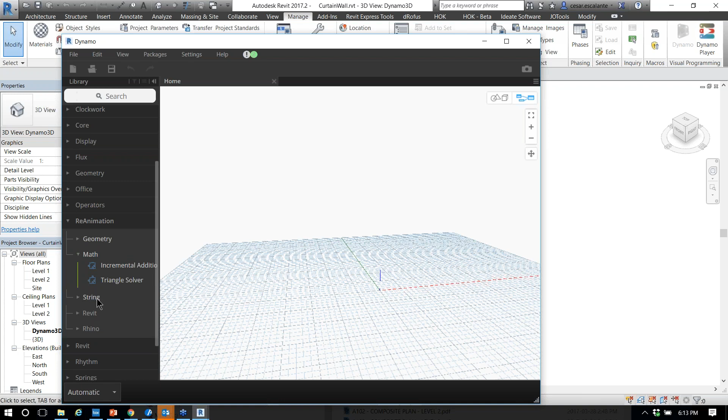So in Dynamo, I was looking for a way to automate the distribution of grids in curtain walls. And I've been searching for that magical node that allows us to do that. And through that, I came across this. You can see I have a lot of packages installed. I came across the Reanimation package by Travis Williams, who developed this little package which has a lot of interesting tools.

The ones related to Revit, these two nodes really caught my attention. One is the ability to move or readjust curtain grids. Another one is the ability to create curtain grids in curtain walls. Parametrically, that has always been a challenge, because one thing is to be able to select grids, another is to be able to delete them and recreate them without needing to run the script twice. After a couple of tries, I was able to come up with a very nice workflow.

So the potential uses of this: think about what it takes to create a pattern-based curtain wall. If you use the out-of-the-box functionality of Revit, all you see is regular distributions that are equally spaced, and you follow those three rules, I think, start, the beginning, end. But what if you want a distribution, let's say, 4 feet, 2 feet, 3 feet, and repeat that pattern over and over? That's not something that Revit does out of the box. So let me show you the script here.

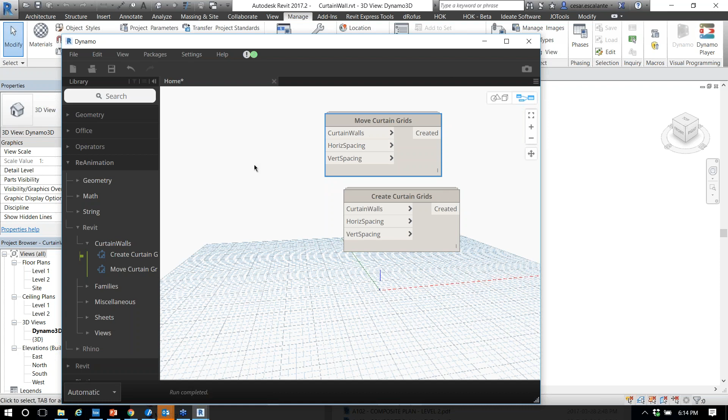This is a blank new project in Revit, and all I'm going to do is create a new wall using the out-of-the-box curtain wall. If you're not familiar, this is the gigantic piece of empty curtain wall. This doesn't have any grids or predefined set of mullions. So if I want to create a pattern distribution of grids, I have to do this one by one, right? The easy way is you create an elevation, start placing grid by grid, then using temporary dimensions, assign them one by one and readjust their location.

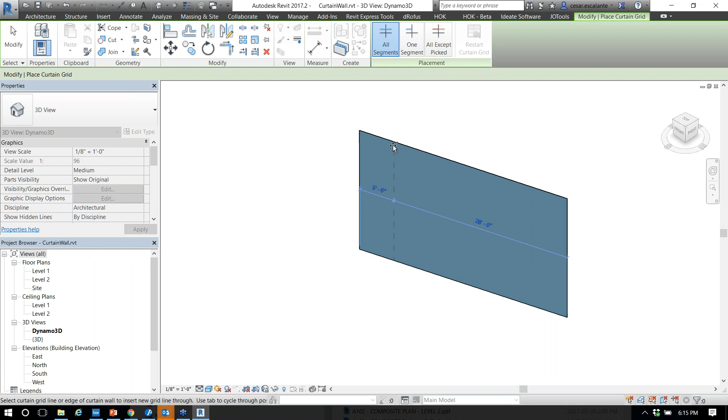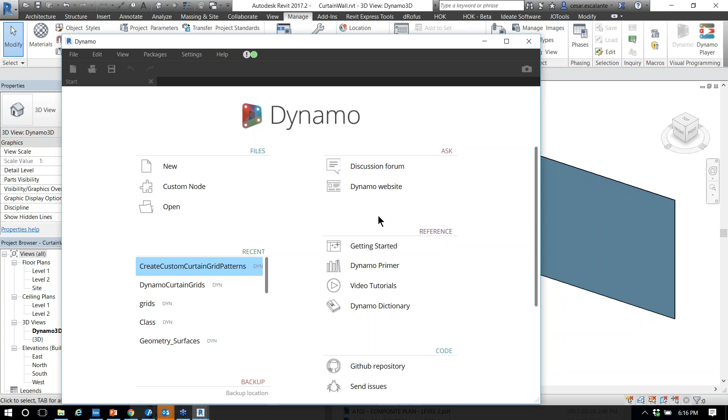This process of putting grids one by one takes a lot of time. And if you decide that the pattern needs to change, I need to basically rebuild everything from scratch. So what a pain, right? So I looked into Dynamo to see how I could expedite the process. I'm going to launch it. I made use of that little node from the Reanimation package. I call the script Create Custom Curtain Grid Patterns. I'm going to show the solution, and then walk into a couple of the nodes.

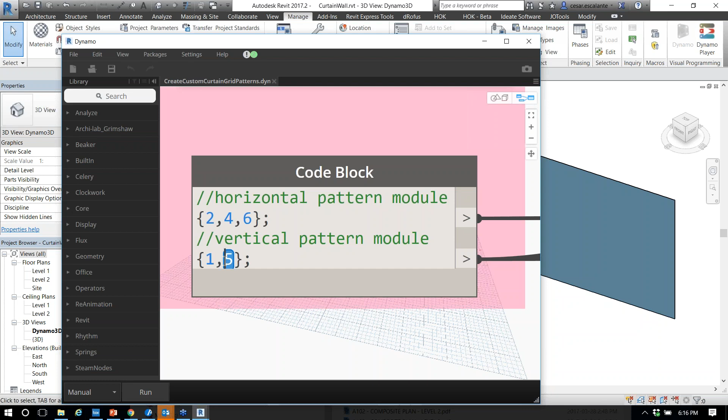What this basically does: I need to select a curtain wall from the project. Then in this little code block, I define the pattern module that I need, both in the horizontal and the vertical. And that's all. This is in the units in Revit, so this could be 5 feet, 3 feet. Let's change it. Let's say in the horizontal, I want something that is 2 by 4 by 6. And in the vertical, I want something that is 1 and 5. Those are the inputs from the user.

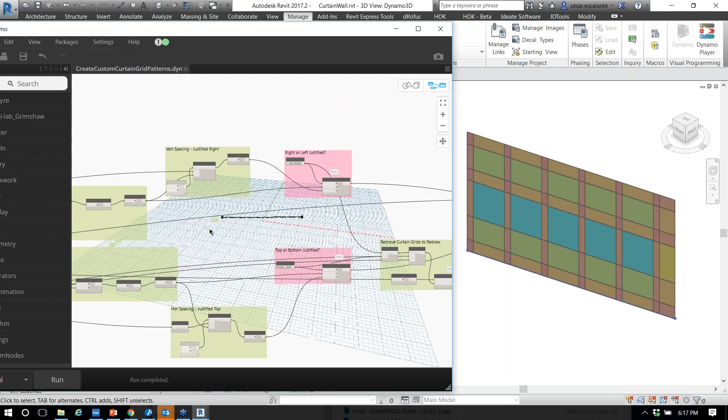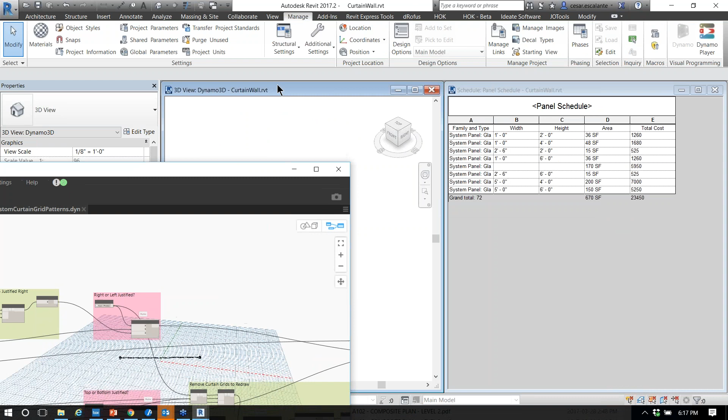Running the definition will create that distribution. The color code is just a way to identify panels by the area and the size. If I'm interested to start exploring things like what is the implication of that in a schedule, then I would open a panel schedule here, go back to my 3D view and tile it, and see what these do.

Say I want to explore different changes and have a total count of panels at the same time. All I need is to go back and revisit the formula. Say my pattern needs to be 4, 6, and 1, and the horizontal pattern changes like 2 and 6. Run the definition, and there you have it.

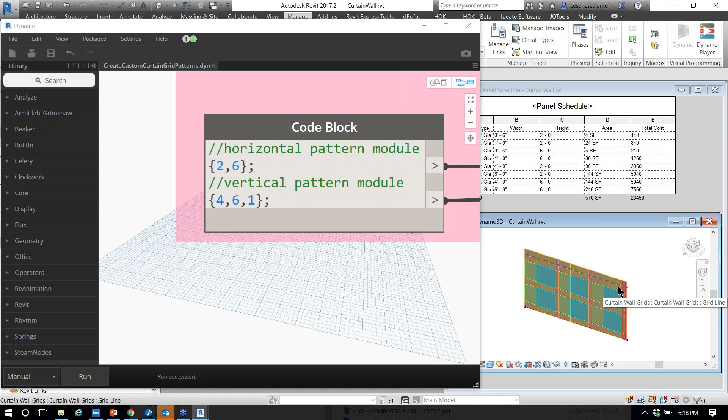Doing this manually, it's really intensive work. And so I have the schedule of all the curtain panels on the side, and I can see the count, and I made a figurative cost to start also looking at what it would take to build something like that. And the beauty of this also is that I have the ability to change the justification.

Say, right now, the start value is from the right. What if I want to do it to the left? If I want to do it from the bottom up? I just change this Boolean and run it again, and that changes where the start point is. And I could go even further and say I want it to be centered. I didn't develop it that way.

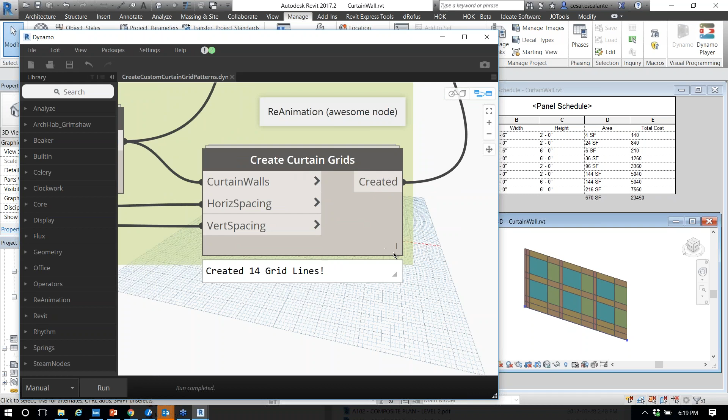But the magic of all of it is right here in this module. This is a way to create curtain grids. And the other complication was, to enable it, I use this pass-through node to wait for Dynamo to execute a certain graph before it goes into the next one. And so this is from Clockwork.

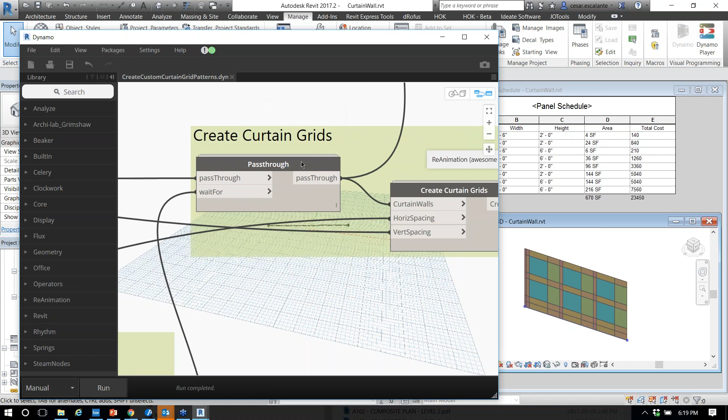So that is the application I have. I thought it was something I wanted to share. So if you have questions, again, the Rhynamo package, you can download it from the package manager. You can start building an application like this directly using Dynamo. Any questions?

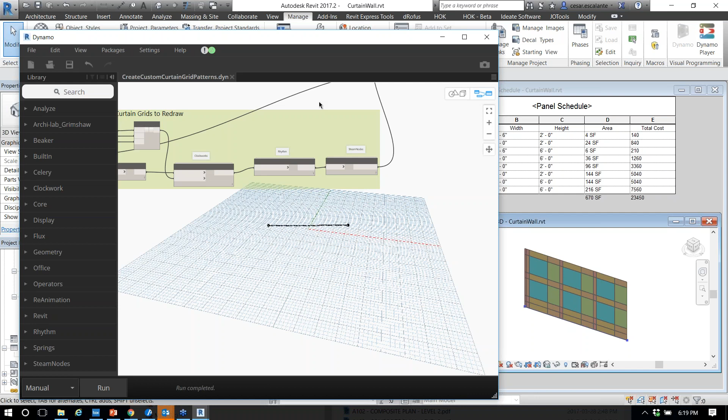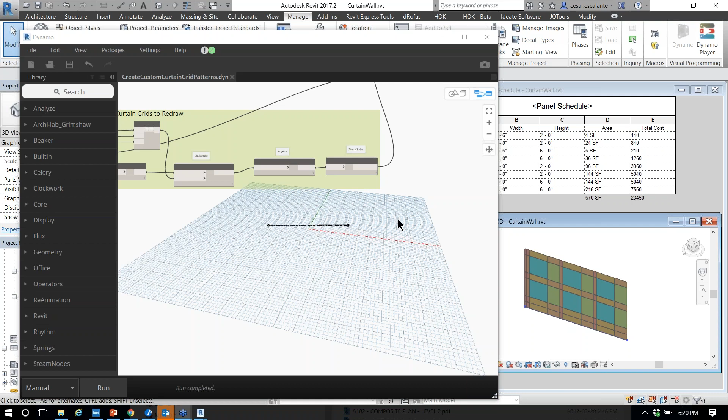All right, so I'm going to hand over the presentation to Thomas Trinelli. I'll just change the mic on the other side because I need my voice. Oh, yes. Make you the presenter. And you can wait. Yeah, it should load. All right. There you go.

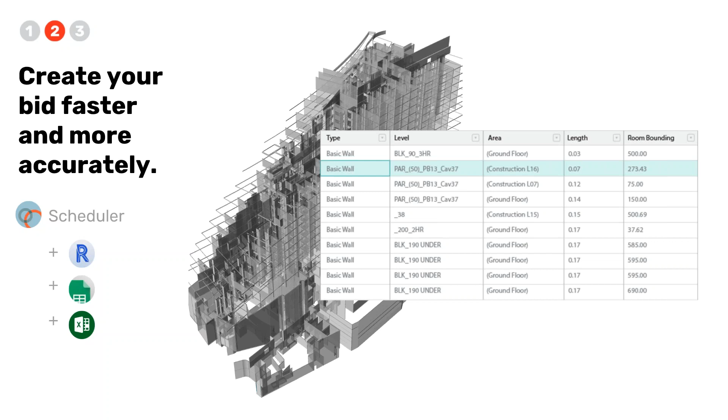And we also are growing these apps. So we have a section called Flux Labs where we surface apps that are currently under development. They're in beta, and we're looking for feedback on them. One that I like is called Capacitor. So early company, pretty nerdy. If you've watched Back to the Future, that should ring a bell. And what this allows you to do is to go back in time for a single data point.

So whenever you send information to Flux, we capture the whole history. So if there's been an issue or an error or something that was introduced that you're not happy with, you can go back and retrieve a past version of that specific data point. So no information is really lost in the platform. You can always retrieve it back if there was an issue. And that's also part of the service that we offer. For a free user, you have about 90 days of data history. To get more, you need a paid subscription.

And we also have a cool one called Terra, which allows you to push the model directly into Google Earth for visualization. So you can just push new geometry, and then on a click of a button, you see that on Google Earth.

And finally, the last section I wanted to talk about is apps that other people have built. So we're an open platform, and we will support and we will help anyone that is interested in building their own apps. We have a team for that that provides support, we provide training for our SDK and API, and so feel free to reach out if you have an idea of something that you would want to build on the platform.

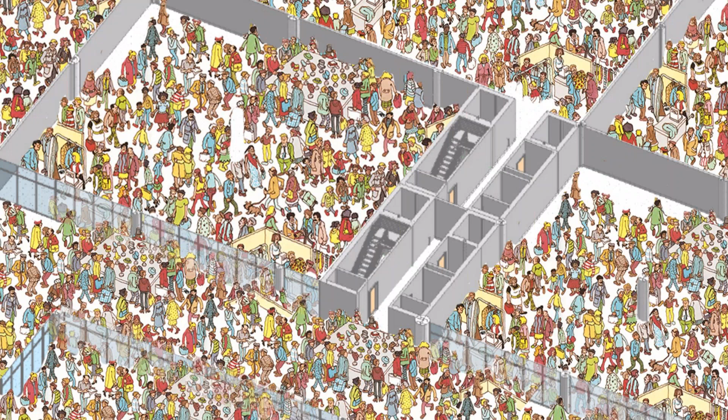All right, so just to finish up on this, the keywords that we tried to keep in mind to define ourselves is Flux is really simple, it's open, and eventually it's powerful, because we are serving data throughout the whole life cycle, and we are eventually going to build this for the whole industry. So, without further ado, what I'd encourage you to do is to start bringing other people in your design. Collaborate more, disregard which tool.

You don't have to worry about, okay, should I start by modeling in a tool or another one? Should I take a course on this one because the team has decided to go with this one? Just choose the one that you like. Choose the one that you're comfortable with, and then make sure the data can be sent to the rest of the team, to the rest of the collaborators.

So we are at Dynamo's user group, so I'm going to give a demo specifically on Dynamo. I have a couple of examples I'm going to go through. Hopefully this should give you a good flavor of the type of things you can do with Flux. So I'm not an architect by training. I have a math major initially, and then I did some structural engineering. So these are just examples of what you could do, but I'm sure you'll get more creative and you'll have a lot better designs than my fake towers that I'm going to show. So feel free to just use them. And also, if you want these scripts or any of what I'm going to show today, feel free to reach out, and I'm happy to share it by email.

So the first one that I wanted to show is creating a floor plan and a building massing. And then looking at how to design a complex parametric facade and create a native Revit topography using Site Extractor, and finally how you can start mining Revit data with Flux. So a lot of people will probably ask me, I can already make a link between Dynamo and Excel if I work on my own computer, so why would I use Flux? Well, what's interesting with Flux is that it's cloud-based, so you don't need to send an email with an Excel spreadsheet. You just need to connect that Excel spreadsheet with Flux.

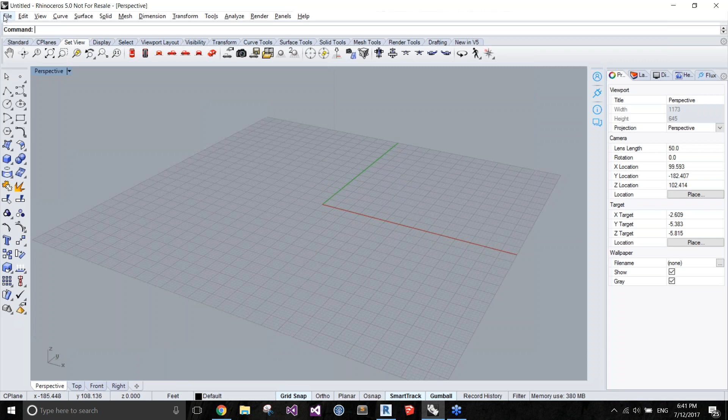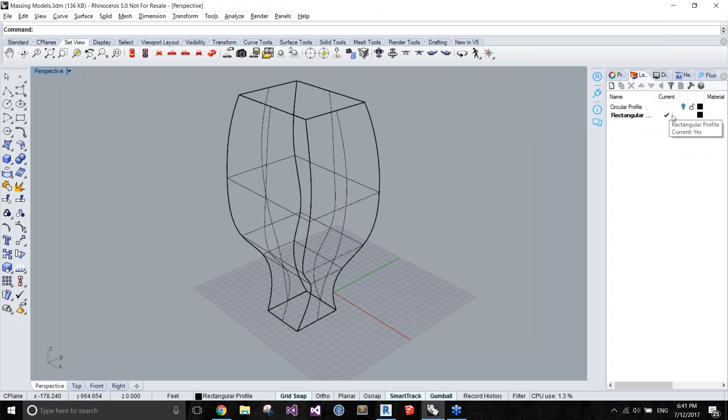So what I'm going to do is I'm going to open a predefined kind of massing model. So what I've done is I've created some, not really simple, but dummy geometries and shapes that you can think of as the massing of a tower. We're just very conceptual right now. We're looking at different options for towers. So I have this little rectangular one and then this more circular one.

And what I want to be doing is taking that massing and start creating a basic floor plan in Revit. And so we'll take the surface either from Grasshopper or Rhino, and we'll slice it directly in Dynamo. So it will arrive as a native BREP in Dynamo directly through Flux. So let's do this. I'm just going to open Grasshopper, and I'll show you that we can do it from both.

I'm going to open the building massing. Wait. Okay, well that's starting good. I'm going to open the Dynamo on the other end. All right, and we're going to open.

And another thing that I am doing in this workflow is also taking the levels from a different source. So assuming the levels have been decided through some sort of an Excel spreadsheet, which will define the different elevations of the level, you also want to be able to integrate all these data sources to create the massing.

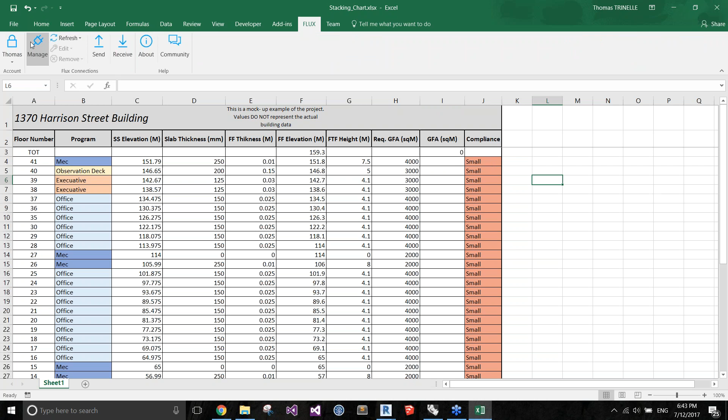And so what I started doing was I created a connection with Flux, and I decided to send the different floor numbers, the different program types, as well as the elevations directly to Flux. So I send them through 3 different what we call data keys. And so the way we communicate in Flux is you create a connection from the tool directly to the platform.

So if I create one live here, I'll just remove this one. What you do is you select the section of data, the cells that you want to connect, and then you create a new connection by clicking Add. And that opens a new window where you have to select a project. So what I'm doing here is, oh gosh, I'm not connected on the right one. There's the risk of making demos. I have lots of different accounts. Let me just connect to the right one.

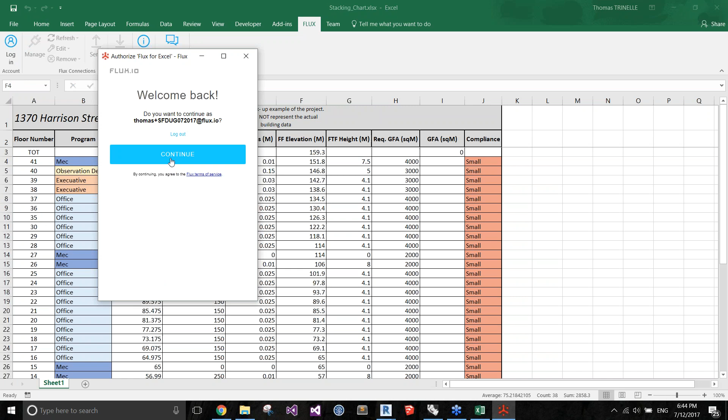By the way, that's a good way to show. So what I'm doing here is I'm logging into my account. Everything you do in Flux is password protected. So it's a secure way for us to make sure the data belongs to you. And we also don't have access to the data that you're sending. Sometimes users come to us and say, hey, I have an issue, can you look into my project? And we're not able to do that unless you give us access to your project data. So everything you send is yours, and it's protected.

So what I'll do, as I said, is I'm going to select that elevation column. I'm going to create a connection, select the SFDUG massing project, and then within it I'm going to select the data key where I'm sending the elevations. So I'm going to do this, and send it. And on the other side, in Dynamo, I'm going to open my massing to floor definition. Yeah. Going on.

There you go. And so same thing with using the Dynamo Flux plugin, you can receive the information natively inside of Dynamo. So it's loading right now, but the first thing you do is you select a project, and then you define what we call a flow mode. So you can either work automatically, which means the data will sync automatically. Whenever someone makes a change, the data will be received automatically on Dynamo, or you can decide to gate the synchronizing speed, and if you click on once mode, you'll have to manually get the new version of the data.

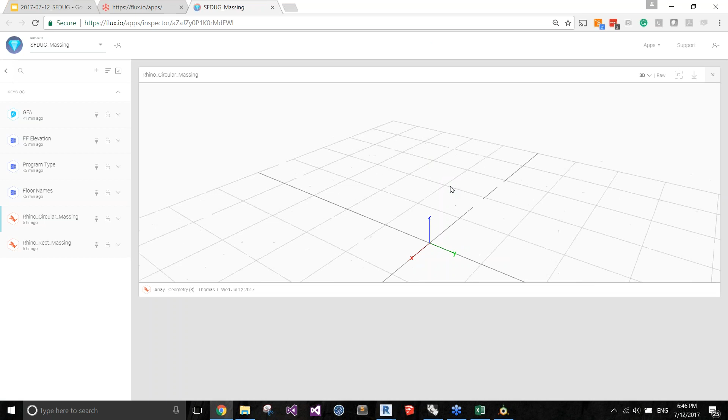And in the background, what happens is that if I go to Flux and I access my platform, I can see that the data is being sent. So if I go to my SF massing project, I can inspect the data, and I can see, for instance, I have the circular massing and the massing for the rectangle building that's loaded, and it's a native BREP. So everything is native, and you can see there is also a scene schema that's being captured.

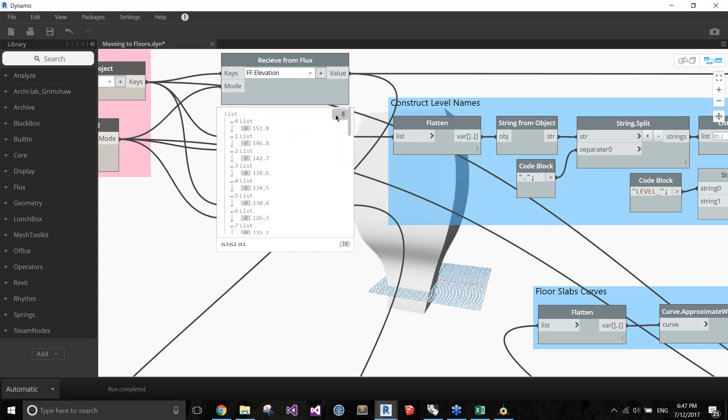So if we go back to Dynamo, I think it's loaded now. I can preview the massing to make sure that it was properly received, and you can see the information arrived in Dynamo, and if we inspect it, it's polysurface, so it really kept the native geometry of what I had initially defined in Rhino. And in here, I'm receiving the different floor names and different elevations that I was sending from Excel.

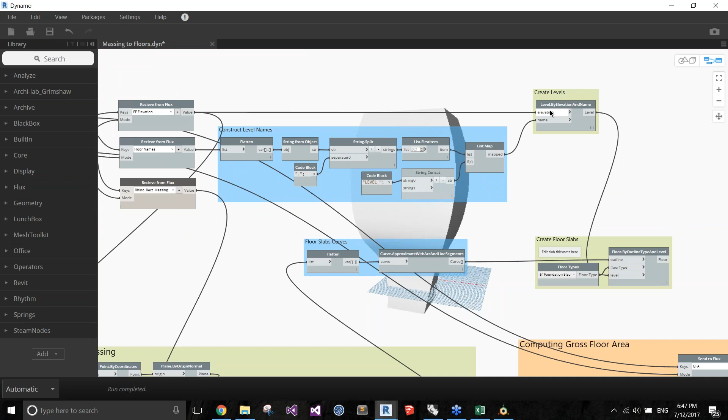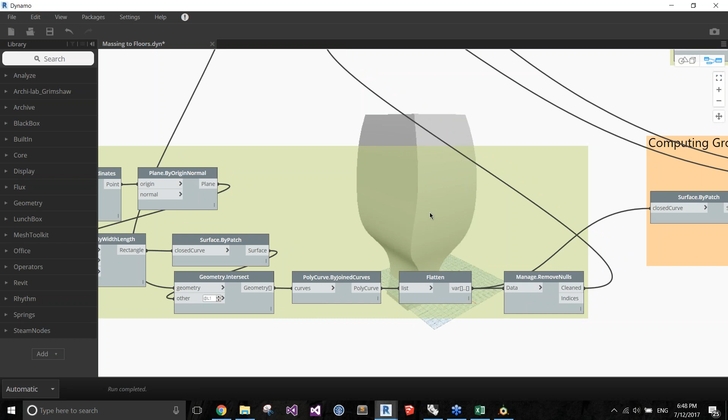And then so I'm sure you guys are all Dynamo users, so I'm going to go a little fast on here, but I'm constructing the level names, then I'm building the levels from here, and then what I'm doing here in the bottom is getting the massing and slicing that to get the different boundary lines that I need for generating the floors. So now that I get all my boundary lines, I can directly create the native floors in Revit. And so if I minimize that window and I look in the 3D view, I have a rough massing of my building being generated in Revit.

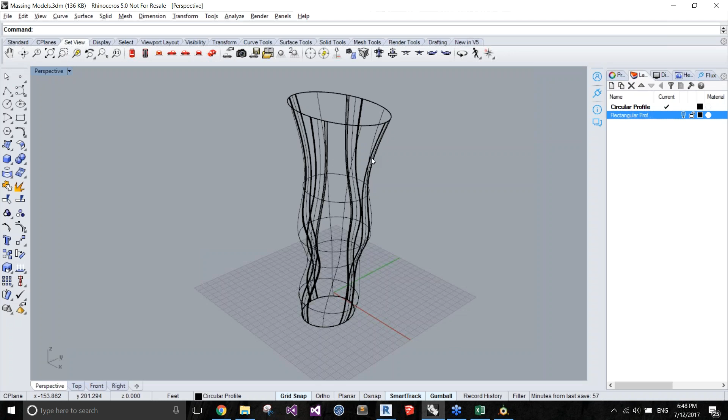And so if I go back to Rhino, and instead of sending the rectangular profile, I send the circular profile. So I'll go to the connection manager for the Flux plugin. I'll just sync and say, please send the circular profile this time. And in Rhino, what I'll do is I'll select the circular profile instead of the rectangular one. And this will change the surface here, and everything will regenerate. So what's interesting is you can let the conceptual work happen in Rhino, and then you can receive that information directly in Dynamo and start doing all of the massing in Revit to start your detailed design work.

And so this is really the tip of the iceberg. I'm sending a polysurface. But you can start sending lines if you're doing line work, or anything you're doing in Rhino could be sent into Dynamo. And same thing, now what I'm going to do is I'm going to receive the gross floor area that I was computing in Dynamo. I'm going to send it into my Excel spreadsheet, and you can see all the elements have been populated, and I have this little compliance check that tells me whether or not that specific floor is compliant with what was required.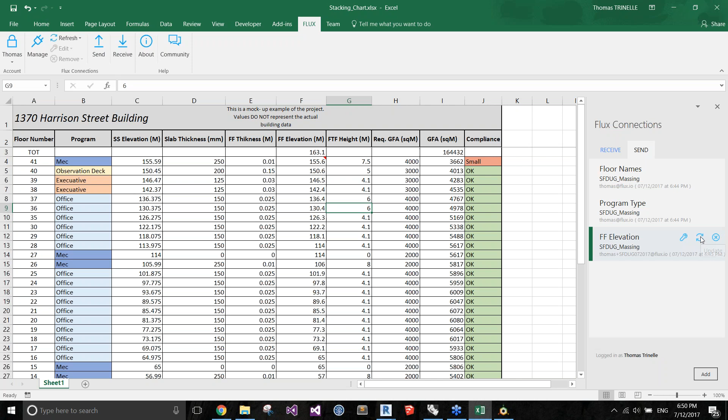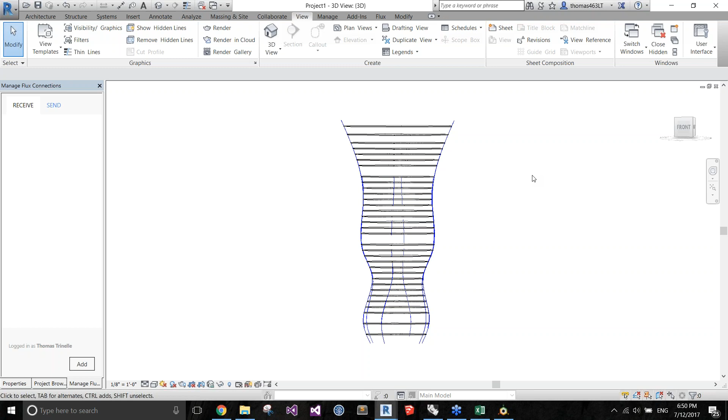If I make a modification and I suddenly decide that I want to change the height of this office space, and I'm going to put 6 instead of 4 for these two, I'm simply going to sync the data of the floor elevation, and it will update the Revit model. So you see the spaces that are being increased. You get a completely bidirectional workflow, and your tools are really working in sync. So you could picture someone doing all the spreadsheet work in Excel, someone else doing the conceptual design in Rhino, and then someone in charge doing the detailed design in Revit.

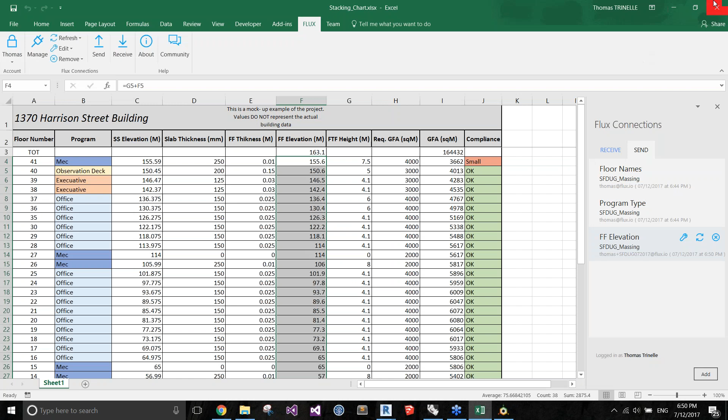So I guess the next one that I want to show, so I'm going to move to the next module, is using the site extractor. I like it because it's fairly visual. It doesn't include Rhino Grasshopper. So I'm going to close this one. I'm going to open a new definition.

So the Excel sheet wasn't generated by Flux. It was created and placed into Flux. Yeah, exactly. The Excel spreadsheet was generated externally.

Someone just sent it to me. You can think of it as a program, and then I sent the data to Flux using the plugin. Yes. Is there a limit in the amount of data you can send via Flux?

Yeah, so it's not limited per data key. If you send 2 gigs in one data key, it'll take quite a lot to just load. But what happens is we limit you in terms of the space that you host in the platform as a whole. So if you create 100 data keys, you might reach a limit, and we limit it at 2 gigs. So right now we're limiting it to 2 projects for free users and 2 gigs of data throughout

the 2 projects. You can also remove the data and repopulate it, and then if you go through the paid subscription, we currently don't have a cap for the number of projects and the amount of data you can store in the platform.

Yes, go ahead. Does it work without the Dynamo tool? Yes, so you could set up workflows to work directly from Revit. We have a Revit integration. Actually, that's one of the modules that I want to show. So for some of what we do, you don't really need to go through Dynamo. And for the sake of here, I'm leveraging the ability for Dynamo to do all these computational logic to do

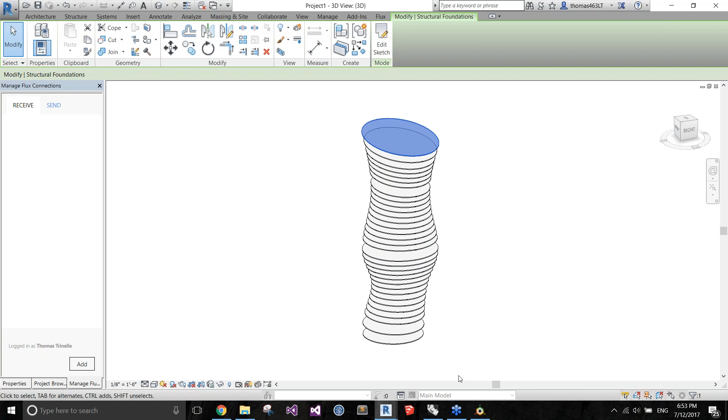All right, so let's go to Flux. Let's open the Site Extractor app. So go back to all the apps, and I'm going to open Site Extractor, which is right here. I'm going to launch it. The first thing you need to do is authenticate. So what we do with all our users is you have to authorize the app to be connected to your account. That's kind of similar to when you install an app on your phone.

So you're going to click here. You're going to allow the app to be connected. And then you select a site. So if we select this building, for instance, in San Francisco, I'll be redirected to that area, and I have this little selection box that I can move around to select a site. I can change the size of the box. I can change the location of my site.

And then what I have to do is select the different data types that I'm interested in. So if you want the building footprint or the building heights with the model and the extrusions, the topography, and so on, you can also define the intervals of the contour lines. So let's say 10 meters, for instance, and I get some water just to see some more interesting topography.

And then the next thing you do is select a project. So for this specific use case, I'm going to use the site context project, and I'm going to send the data to Flux. So what Flux is doing right now is scraping the information. It's taking all the data from OpenStreetMap, the USGS database as well, and it's sending it to the platform.

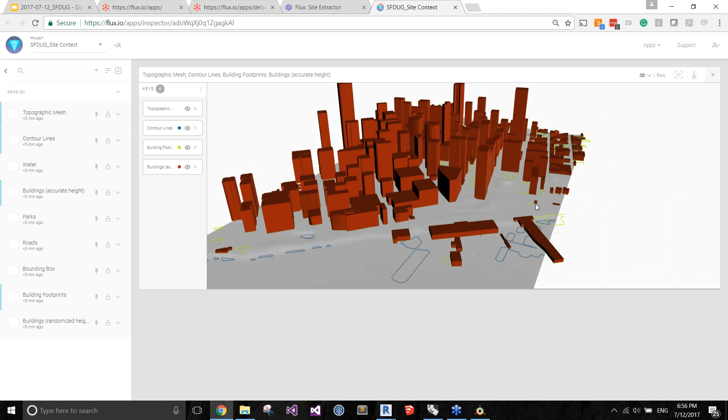So I have all the building footprints of the city of San Francisco in here, and I can also add the massings. So depending on whether or not OpenStreetMap gives us the accurate height of the building, we will generate the whole building massing. You can also get the park and road lines.

So from here, you're probably wondering, yeah, that's nice, that's cute, I can see it, but I want to be able to model with it. So what we'll do is we'll create a native topography from that information. So we're going to go to Dynamo once more, and I'm going to open another definition. And it's very, very simple.

It has 5 blocks. The 3 blocks on the left are the Flux blocks. So as I said, the first one is allowing you to select a project. So you're selecting your Revit topography project. I'm going to change that in a minute, just because I was working with the SFDUG massing project. And then you select the data type, so the data key. So this will be the topography.

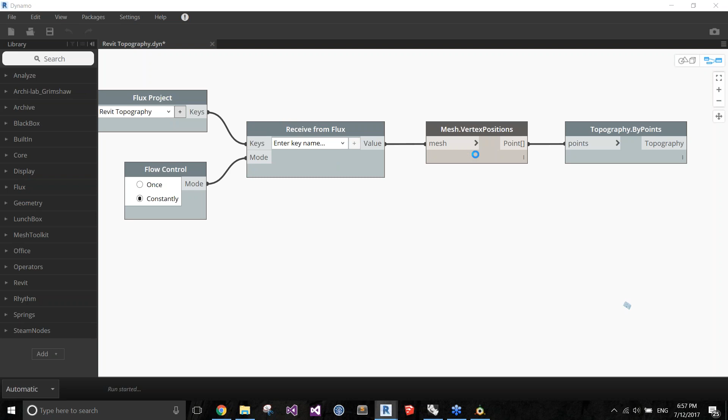And what we're going to use is the mesh vertex block to get all the points from the mesh. So yeah, generating the topography, depending on the size of your topography, can be a little tricky.

Gosh, what's going on with my screen? That's what I was worried about. Revit not behaving.

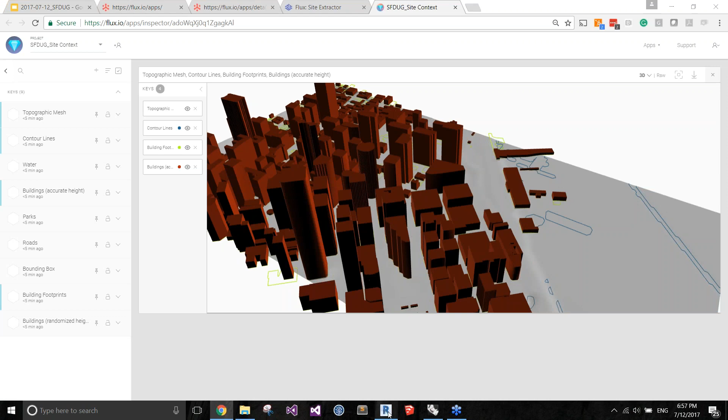The question: are the buildings then part of the topography category? No, so what happened is all the data was sent separately in different keys. So the buildings are just a key with the buildings, and the topography is another key with the topography itself. And so you choose then to send whichever data you want.

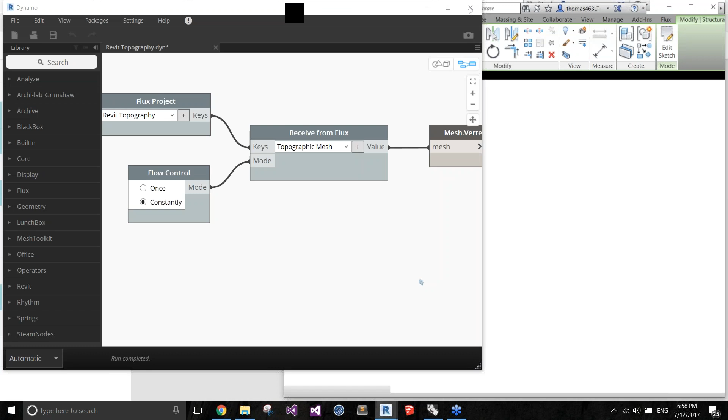So there you go. Okay, that was pretty complex. So let me just do that step by step with you, just to clarify that a little. So I'm going to log out, I'm going to log back in, authorize the app to be connected to my account, like I explained. And then I'm going to select the project, the SFDUG massing.

And this is where you're going to select the topography versus the building height. So I'm going to select the, no, not the massing, sorry, the one site context. And I'm going to select the topography. And this will recover the topography that I've just selected, create the points and create the topography in Revit.

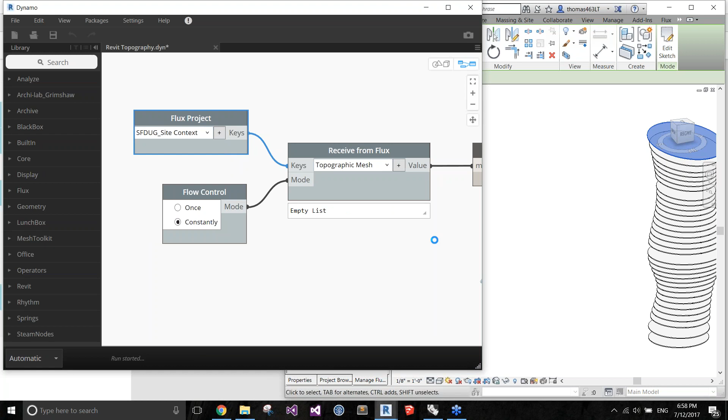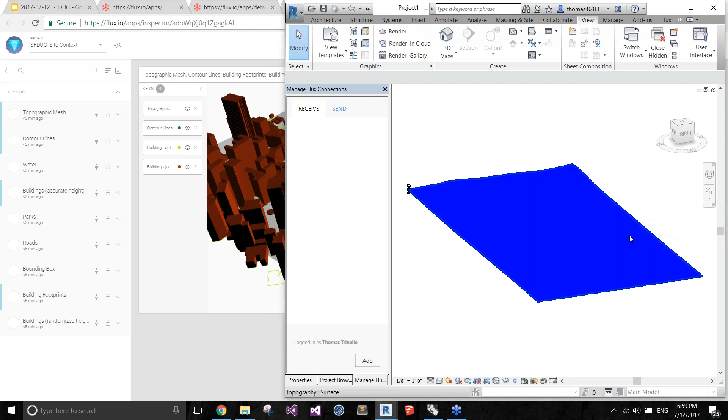So what's interesting is if I change the site from Site Extractor, then all this updates in real time. And so you can see the topography being generated in the background. There you go. If I go to Revit and I rescale that view, I have the topography. Let me just hide all this, because otherwise you don't really see much.

But this is native topography being generated directly in Revit. So this is a native object and you can start modeling with it. And if I go back to the Site Extractor app, let's take Twin Peaks this time. Twin Peaks might have some more interesting topography. So if I take this section here and I update with the site context, everything will be updated in Revit accordingly.

There you go. And so now I have the topography of Twin Peaks in my Revit model. So you could also extend that and start using the model lines to generate the building contours and start modeling around that. And so you have your whole site context.

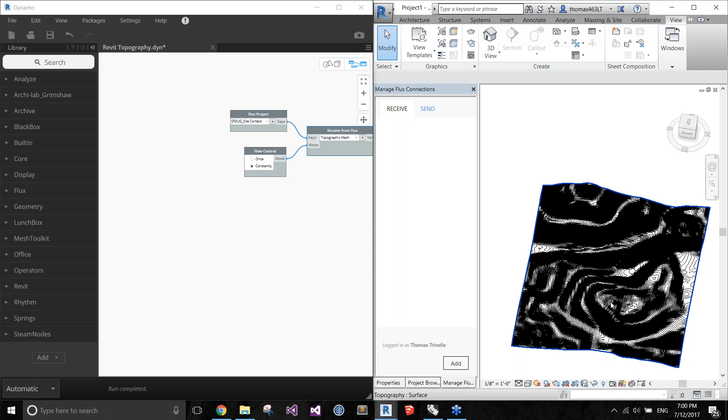So it's pretty busy right now because I think when I extracted, I selected a pretty small contour interval, but instead of putting 10 meters, if I put 50 meters, the accuracy of that topography would be different. So that gives you a very easy way to get actual Revit topography in your model, to start modeling with accurate topographic information in Revit.

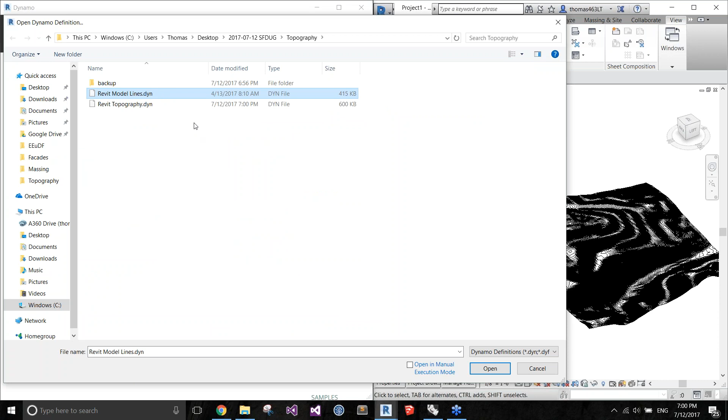The other example with the site context was to create the model lines. So if I open the model lines example, what I'm going to do here is a similar process where I'm going to go to my project, and instead of selecting the topography this time, I might want to be able to select the building contours.

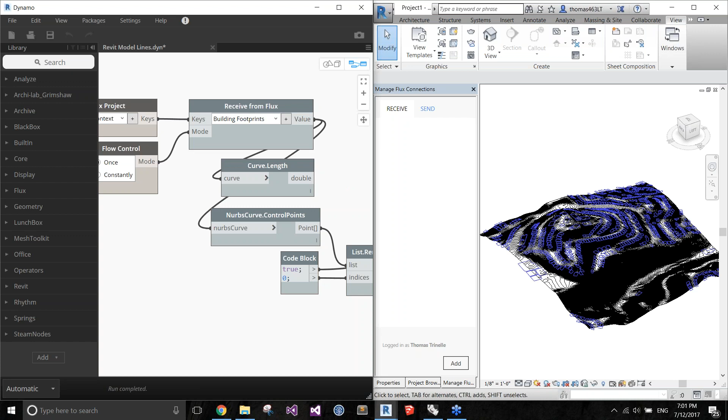So I'm going to get the building footprint, and then I'm creating a NURBS curve to generate all the model lines for Revit. And so what happens here is I have the model lines being generated in Dynamo, and the next step is to create actual model curves in Revit.

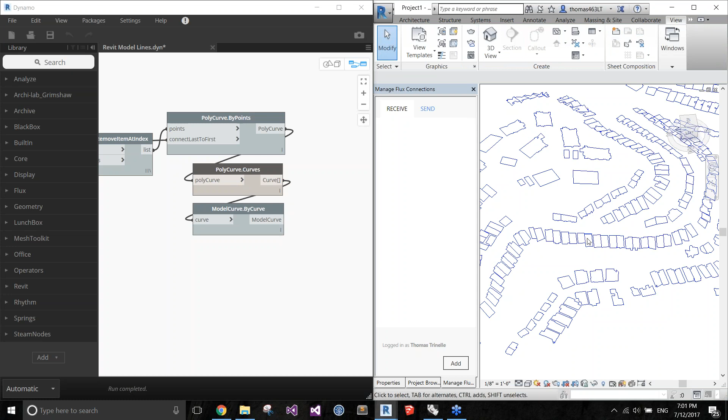So all these are following the topography, so they're actually 3D lines. But if you wanted everything to be flattened, you could do that as well. And so here now I have actual model lines for my building contour, so I can start modeling in Revit with these model lines.

All right, and let's go to the third one. So hopefully you're still bearing with me. There's another use case that I wanted to show, which was doing some facade modeling.

So I've been helping a client lately doing a lot of that because the subs that they were working with were using extensively Rhino and Grasshopper to do all the work in the factory, because the geometry that they were able to generate in Rhino was a little bit more accurate, but they also wanted to have the detailed plans of that particular roof structure printed in Revit.

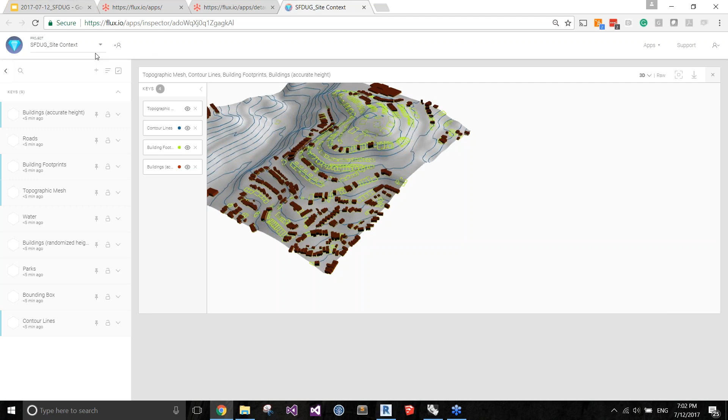And so what we were working on is the ability to get all that structure that was constantly moving. It was being updated almost like twice a week, and have that structure that was designed in Rhino through a Rhino shape being updated in Dynamo and then in Revit. So I'm going to switch to that other project called Facade.

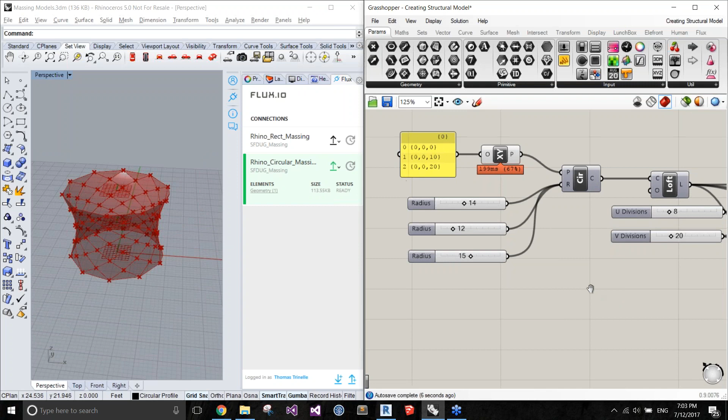So for the purpose of this one, I had already created a simple structure using Grasshopper. So I'm going to open my Grasshopper right here. So this is a very simple model where I'm generating some sort of a surface with different circles. I can move them around, and then I'm using a block from Lunchbox that allows me to do a diagrid, some sort of panelization.

And what I want to be doing is from here create actual glass panels in Revit and actual beams in Revit rather than just generic direct shapes or generic elements. So instead of sending the actual geometry, I'm going to send what's needed for Dynamo to generate these items.

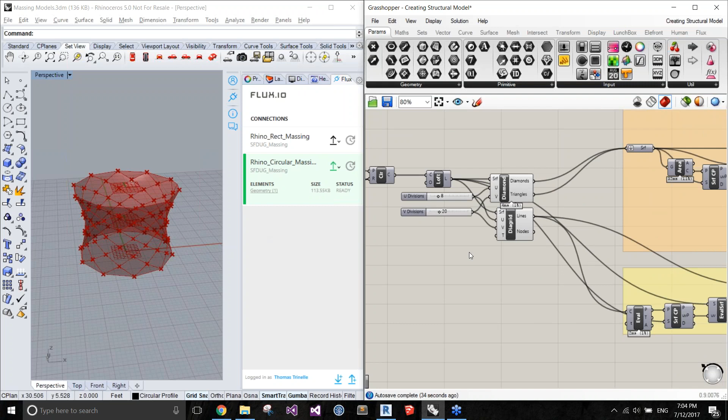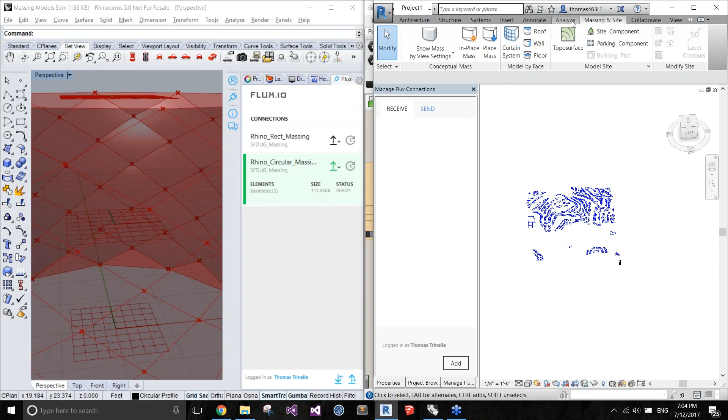And so what I'm doing is I'm extracting the points. For all these panels to be defined, I'm extracting the points here in Grasshopper. I'm sending those points to Flux, and then on the other end, in Dynamo, I'm going to reopen Dynamo. Gosh, my Manage tab just went away. So I'm going to open Dynamo. And this time I'm going to open the third definition to create the facade.

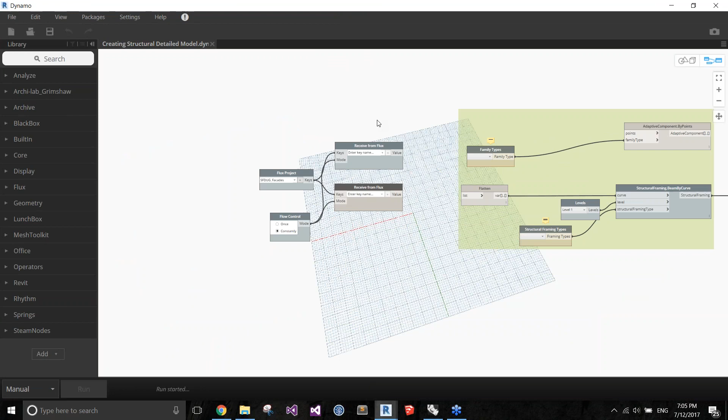And what I'm doing is on one end receiving the points, and on the other end receiving the lines. So if I run this, you can see that I'm receiving the panel points and the panel lines. And if I inspect the geometry in Dynamo, I have this geometry being received over there. And I can also preview the points. There you go. And I'm going to use those to generate the model in Revit. So as you're aware, you'll have to have the families opened in Revit.

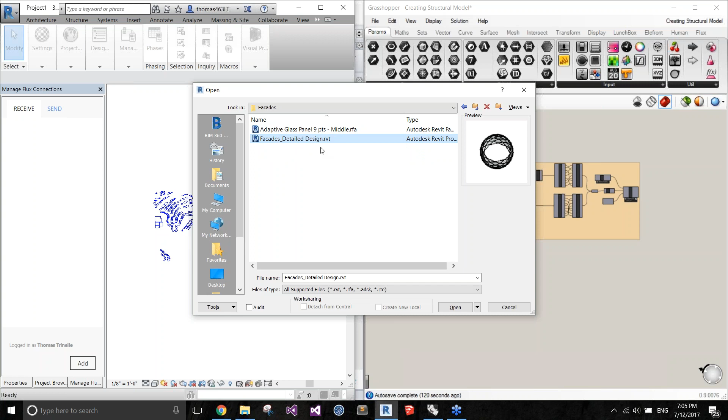So I just have to open the right Revit model. Oops, no, desktop, SFDUG, facade. So I'm going to open this one. I already made a test earlier today, so you can have a preview of the result. But I'm going to cancel that. I'm going to reopen Dynamo. There you go. All right, so if I start from here, I redo what I just did, just to show you the step-by-step.

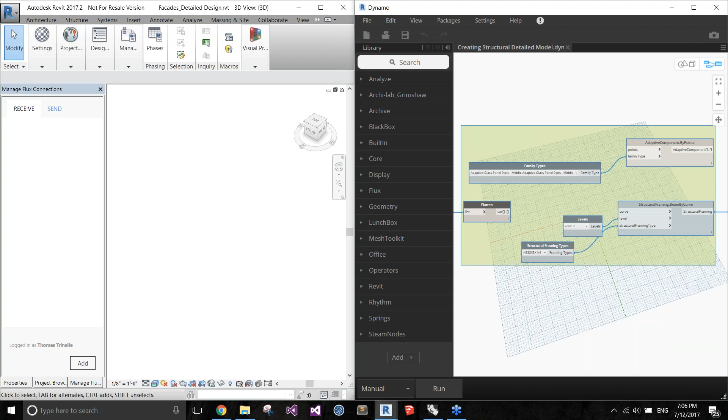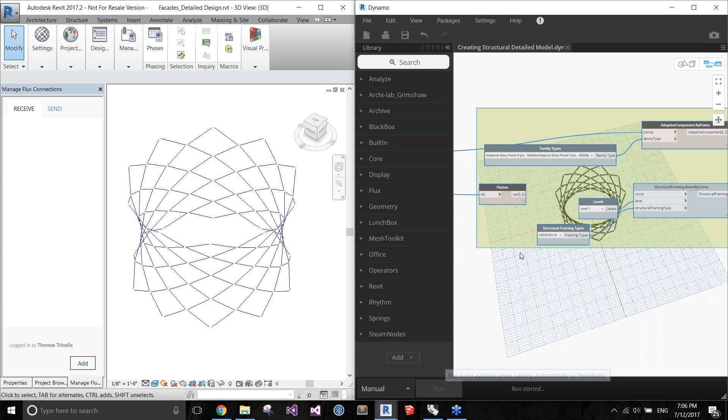Run those, so my elements are being generated, so I have a preview in Revit. The first thing I'm going to do is generate the glass panels, so I'm hooking up the points with a Create Adaptive Component node, and I'm selecting this Adaptive Glass Panel 9 points family that I created for the sake of that presentation. And then as I run it, the glass panels are generated here, and I could modify the geometry in Grasshopper, and this will be updated live.

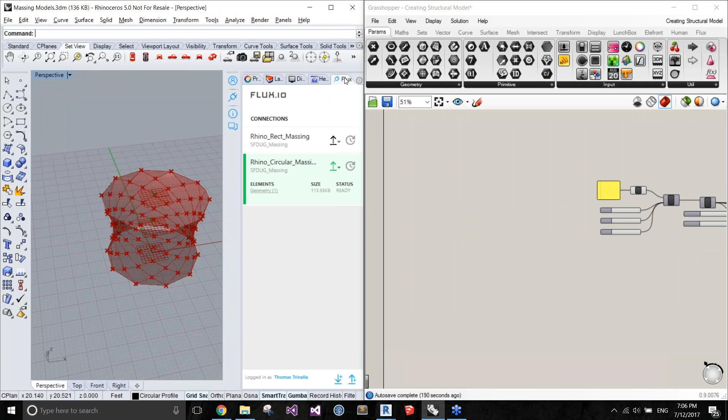So if I do a change in the geometry that I wanted to define, I'm going to go here and modify this. I go back to Dynamo, and what happens is I see that this connection is turned yellow, telling me that the data that is in the platform is not in sync with the data in Dynamo.

And so, as I said, if I had this running in automatic mode, the update would have happened automatically. So right now I'm setting this as a manual update. And so as I click run, it will regenerate all these panels and the data updates.

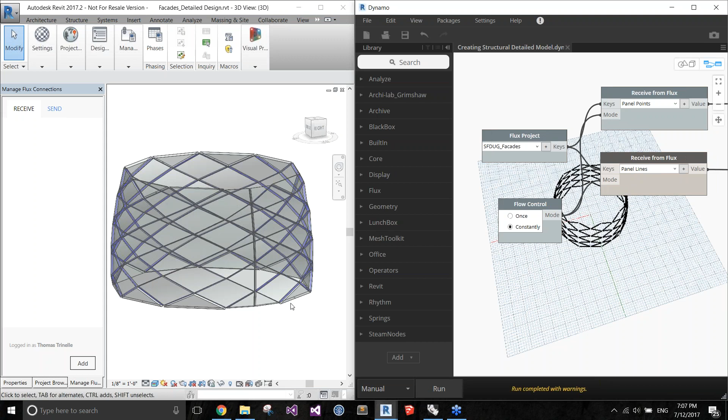So that's a very easy way. There's no file updates. There's no reason for the data to be lost somewhere. It's all living in the platform, and the subs that we're working with, Grasshopper and Rhino, could just, as soon as they're done, sync with the data, and then in your office you can recover that information.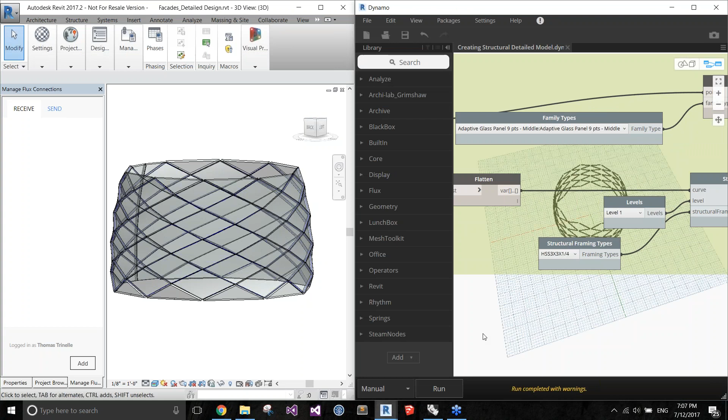And then what we're going to do is we're going to create the beams. So if I connect that, it will generate all the native beams. So I have here, I zoom, and I can see that these are native Revit beams. There you go. And so that's using the structural framing beam by curve block in Dynamo.

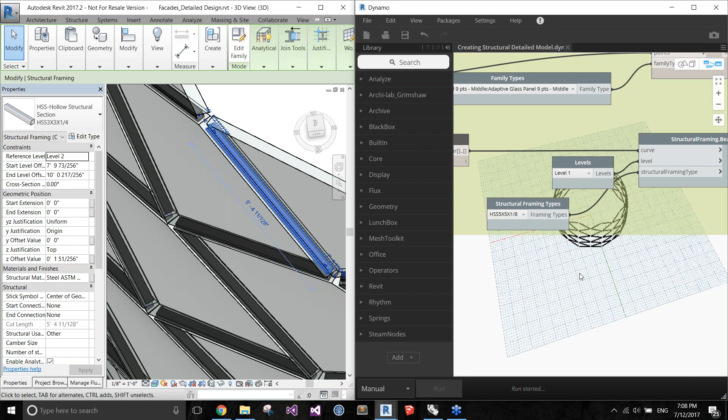And again, if I were to make a modification, maybe this time I'm going to modify the diagrid, modify this so I have my grid system that's moving a little. I go back to Dynamo, run it again. I have all the data that's going to update. It's flowing through the platform. There you go. So now I have my other model.

All right. So the last thing I wanted to show, am I still good on time or? Okay. So is there any question on this particular workflow?

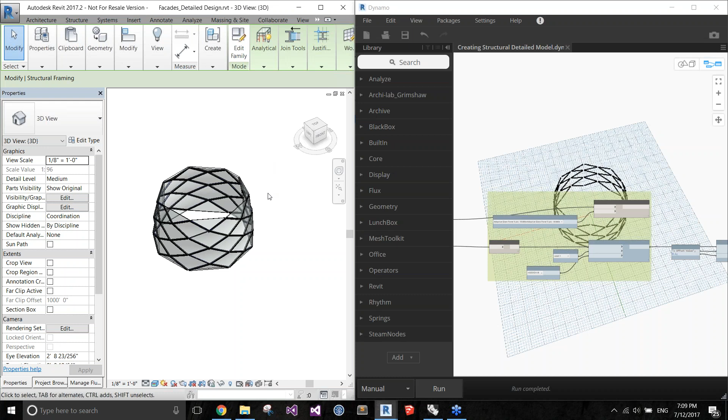I know we're going through very detailed examples, but yeah, I wanted to show some educative content and how to use Flux with Dynamo. And so the last one I wanted to show is how you can actually mine Revit models with Flux. So I'm going to open a simple Revit model. So this is the one that everyone has access to. It's the sample Autodesk model, this little house right here.

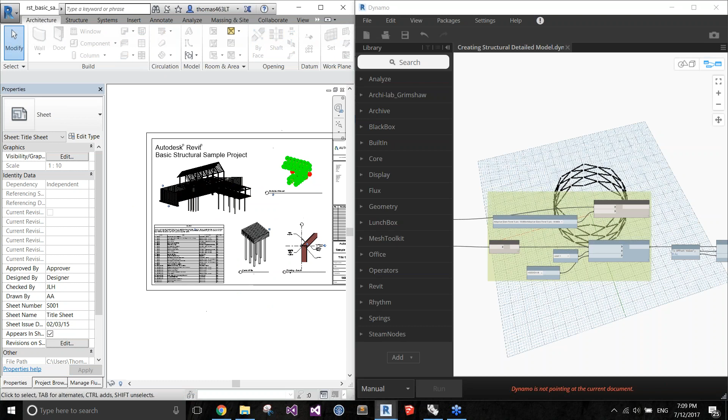And so what I've done is I've sent part of the data to Flux using our Flux product for Revit. So we have a connection here with Revit. If I send that to Flux and I can inspect it directly in the platform, I can see that all the geometry has been sent along with the metadata.

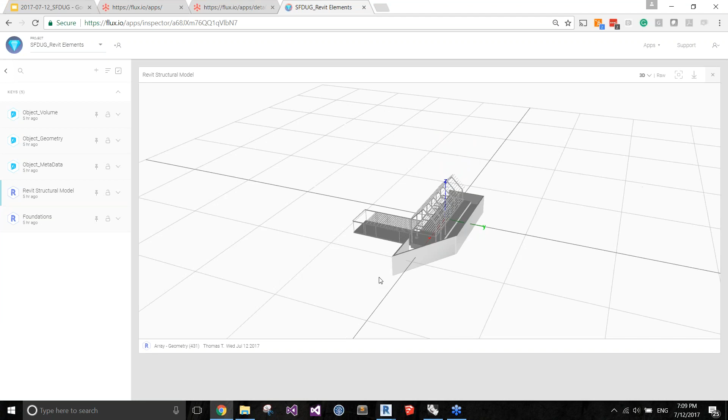But what happens is we are constantly growing this plugin, and not every single category of object is supported by the plugin yet. So if I navigate through that little house here, I can see the foundations, for instance, are absent, just because the Revit plugin doesn't have the ability to collect all the types of families. So I'm going to use Dynamo to extract that information and send it. And I'm extracting that geometry natively.

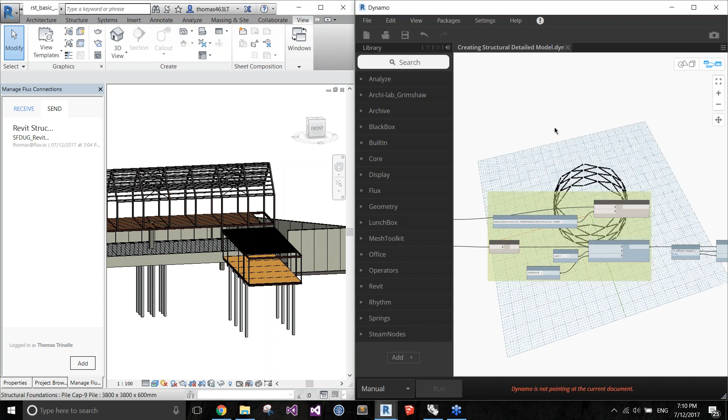So for instance, if you were doing some energy analysis, you can extract all the geometry from Revit, push it to Grasshopper, run your Ladybug, Honeybee, and that can be done live with Flux. So as the Revit model updates, you send updated data to Grasshopper. So what I'm going to do is I'm going to open another Dynamo definition. If this one wants to close, no, it doesn't want to close. There you go.

So what's happening here is I'm extracting the objects from Revit. So I'm selecting a specific family category, like the structural foundation, and then on one end I'm getting the parameter, for instance, the volume parameter, or I'm extracting the full list of parameters here, or also extracting the geometry. And I'm sending all that metadata and the geometry as well to Flux. And so all this geometry is being generated as a list of solids, and we'll go ahead and inspect that in Flux.

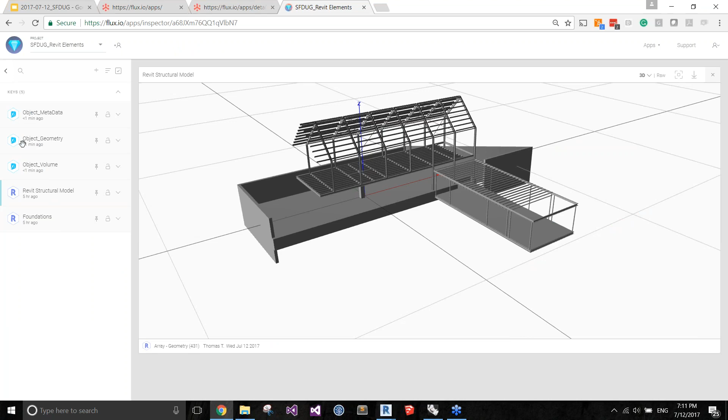So you can see I have these three Dynamo keys that have been created. And if I double click on them, I can inspect them. So this is the list of parameters that comes as a table. So all the foundation objects and their parameters are being sent. This is the list of volumes for all the foundation objects. And then I have the geometry as well being sent to Flux like this.

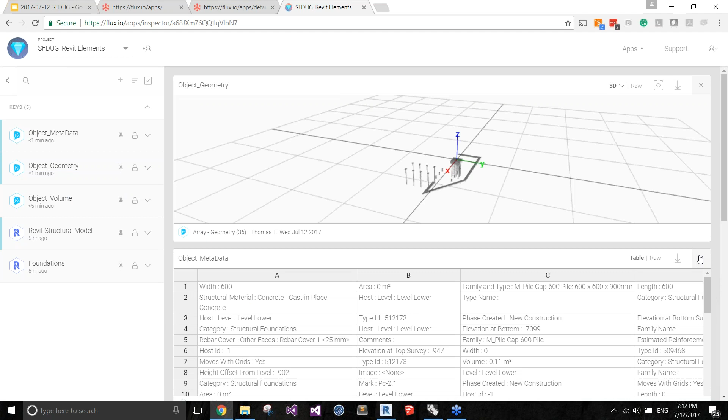And I could, if I wanted to, just visualize that with what I've already sent. There you go. And then I have both being loaded directly online here. I could generate that as a public data key, and I could also send it to anyone. So if I want to show an update, I can turn that into a link.

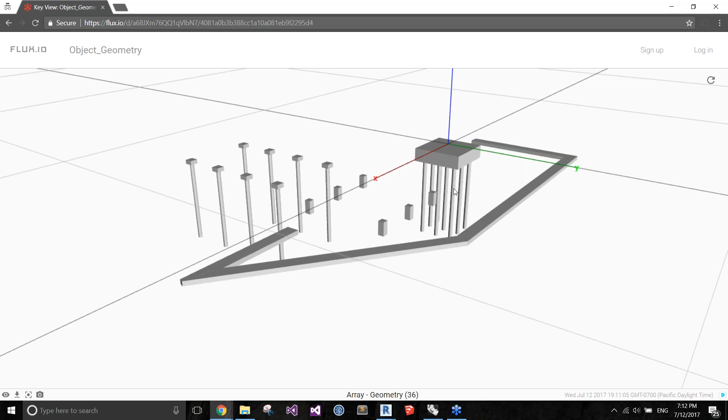Control C that specific URL, and then if I open it in an incognito window or I put it into an email, anyone can access that data on the web. So it's going to load, and I have the geometry that I just generated here, which can be accessed anywhere. So if you're trying to show progress to your project manager or something, you don't need to send the whole Revit model. Just publish it to Flux, share that link, and there you go.

You have the model in the web. What's interesting is you can think of this as being a first step to performing, for instance, thermal analysis or energy analysis. I was showing an example with structural foundations, but if I were to open the architectural model of that particular building, I could send all the rooms, for instance, and extract the thermal properties of that room, send that to Grasshopper and run, for instance, an analysis with Honeybee and Ladybug. And so I'm really mining the data that was in Revit and I'm sending it to Grasshopper.

So that's the 4 use cases that I've had prepared for today. I'm open to receiving questions. So if you guys have any questions, feel free to ask. And I'm happy to show more of the platform as well. All right, let's see. Do we have questions online as well?

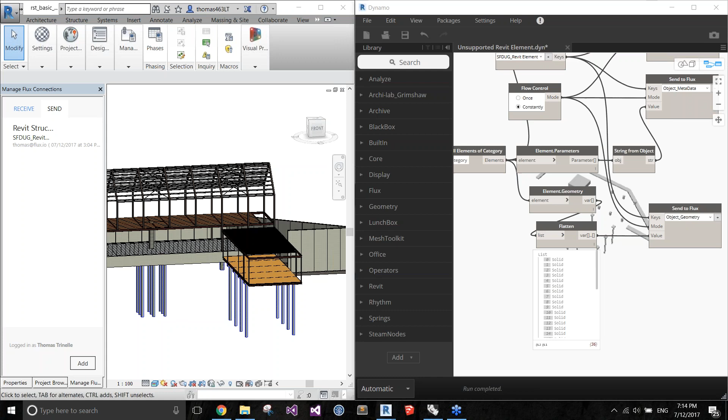Yeah. For your first example where you link the Excel sheet, if you make a copy of that Excel sheet, do you have to relink it again? No, so whenever you save your Excel spreadsheet with the connections, that's also already embedded in the Excel spreadsheet. So if you reopen it somewhere else, if someone copy pastes that Excel spreadsheet, the connection with the platform will already be made. And so that's a risk that you're taking: if you're setting your connections in constant mode, it will always load with the platform. And if these connections are set in once mode, you'll receive a notification within the spreadsheet that tells you that the data is updated, and it's going to prompt you to receive the newest data.

Can you link with multiple Excel files? Yeah. One example. I can't really show the data, but one thing that I was helping a company do the other day was they had a list of 11 Revit models for a hospital. And their operation guys on site were only working out of one single Excel spreadsheet. So that's kind of the other way around. It's several Revit models with one spreadsheet rather than several spreadsheets with one Revit model.

What we're doing is we're sending all the rooms to Flux. We were getting the information to feed it to the Excel spreadsheet. And then the operations guys were updating the spreadsheet, saying, okay, status of the room cleaned or status of the room whatever. And they're sending it back to the platform, and then it would redistribute to the 11 different Revit models, and they could update the attributes of the Revit model directly. So that's kind of the other way around. But you could picture these 3 columns that I initially showed being in 3 different spreadsheets.

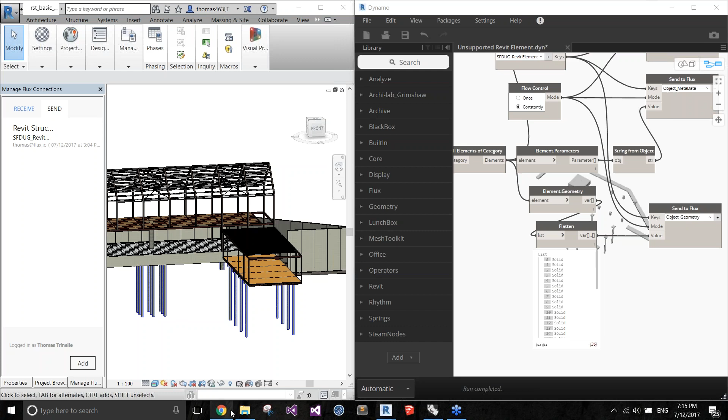That doesn't really matter. Actually, that's also an interesting aspect of the platform, and in the long run, we're hoping to make use of that. If I go back to my initial model about the massing where I was linking with Excel, you can see here if I expand that view a little that I have this little activity and I can click on it and see the activity of that specific data key. So we are able to track who made the change, when it was made, and from which file it came. And so in the long run you can also have a full audit of the building data as you're working in Flux. I'm sorry, I guess it updates. There's a little lag on my screen, but it will show up. Yeah, there you go.

So let me just redo that. If you go to this specific screen with your different keys and you expand with this little arrow here, you can inspect the activity level of that specific key. If you click on View All, it gives you the history. So if we were several collaborators working on this specific project, maybe my colleague Joel, it would have said here, Thomas updated this at this time and Joel updated this at this time. And to do that, I would have had to invite him as a collaborator.

So from here, I would have had to add a collaborator and then say, Joel, please come and feed your data to the platform. And that way he would be able to also edit, and I can give him a different level of access. If I just want him to be able to receive and view the data, I'll give him viewer only access.

Do you guys have any other questions? Yeah, sorry. Doesn't matter which version of Revit or which version of Rhino or which version of Excel? No, it doesn't matter. So as long as the version is supported by our plugin, Flux will work regardless. So right now for Revit, I think we work from 2014 to 17, and we're releasing 2018 shortly. It should be in a couple of weeks.

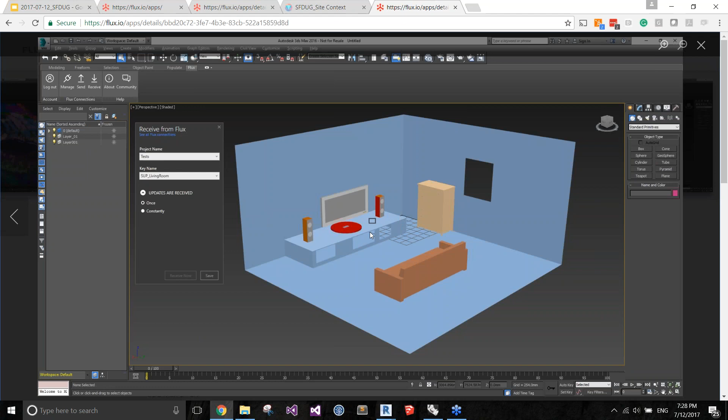I know it's lacking some texture abilities. So we are trying to work to make sure we can support more texture, specifically three-dimensional UVW texture with Rhino, because right now I think we only do UV. Yeah. And I see this plugin was released May 3rd, so it probably supports 2018? This supports 2017. It doesn't support 2018 yet. But I'll make sure to add it to the wish list.

Any other questions? Yeah, go ahead. One quick one. Can you talk about your roadmap at all? What's up for the next year? Where are you targeting? Yeah, so that's an interesting question, another thing that we're discussing with Cesar. Flux is a startup. We are limited in resources and people and funding. So we are trying to prioritize something that makes the most sense for us, economically speaking.

So we are working on releasing a product this summer that's going to target another section of the platform that we haven't leveraged so far. I'm not able to disclose what it is, but you'll know about it in about a month and a half. Our immediate roadmap is to solidify as much as possible the current ones that we have, such as Scheduler, something as simple as making schedules in the web. We want to make these tools really like the click of a button. You just send the data to Flux, you have a template for a schedule, it's already generated, anyone can access it.